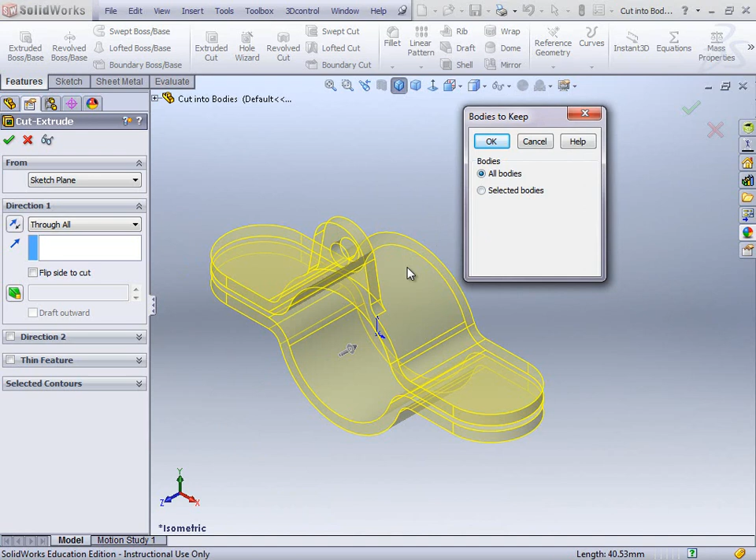We cut through all, and click OK. You see we get this prompt because we're now actually splitting this into two separate bodies. It's asking which bodies do you want to keep - all the bodies or just a selected body, so you can keep half or all of it. We're going to keep all the bodies, so click OK, and now we've got our two separate bodies, cut extrude 1 and cut extrude 2.

Okay, so once we've got those two, what we can actually do is go up here to the solid bodies folder and right click on that, we can insert into new part. So we can select that body and actually create a new part with it.

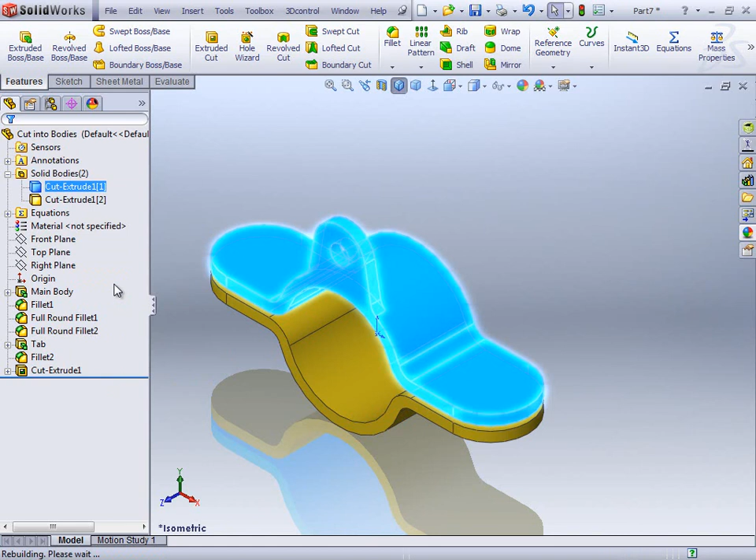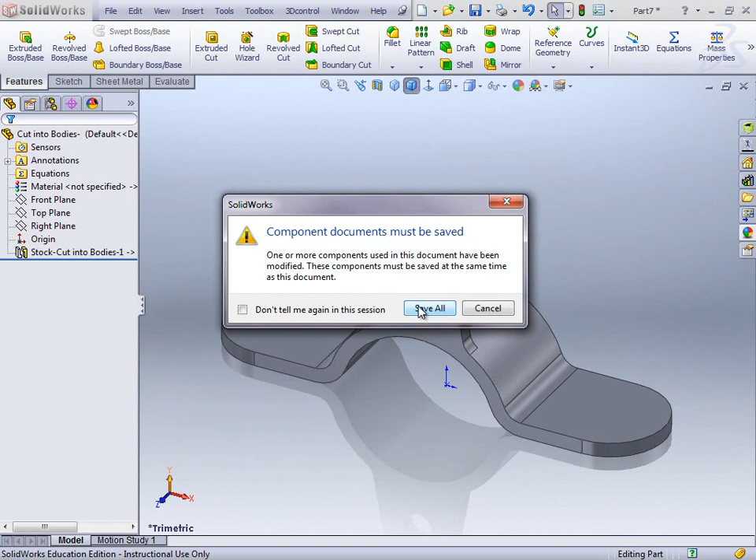So I'll just save it onto the desktop, onto a better spot. I'll call this one clamp top. So clamp top, and save that one. Save our documents there. So it's asking me to save everything once I've done that.

So if I go back to the cut into bodies part again, and right click on the second cut extrude, we can do the same again. Insert into new part. There comes a new part, and we call this one clamp bottom, and save it on the desktop as well.

So we've got two parts. Once we've got those two parts, you can see we've got a clamp top, clamp bottom, and we've still got our cut into bodies.

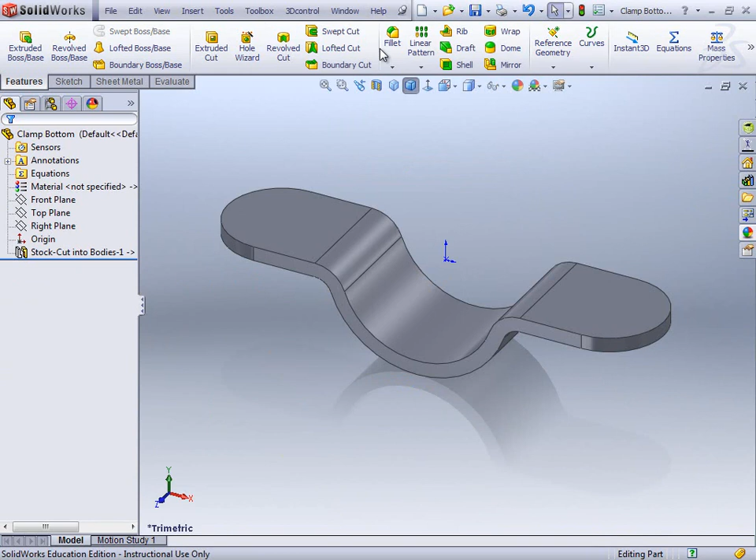Okay, so once we've got that, we can create a new assembly. Make new assembly from that part. Click OK, and we'll start off with the clamp bottom.

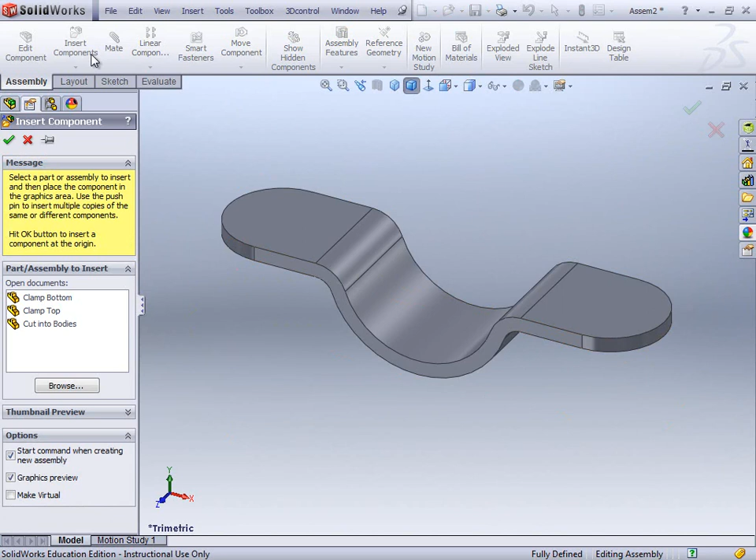And if I just do a little graphics preview on that, I click on the little green check mark, it'll throw it into the center point, and when I insert my component again and do the clamp top, if I select the little green check mark again, it'll throw it, and both of them are fixed in that location. You see, because they're related, so both of them are fixed there, so that's happy days. We've got our little assembly created.

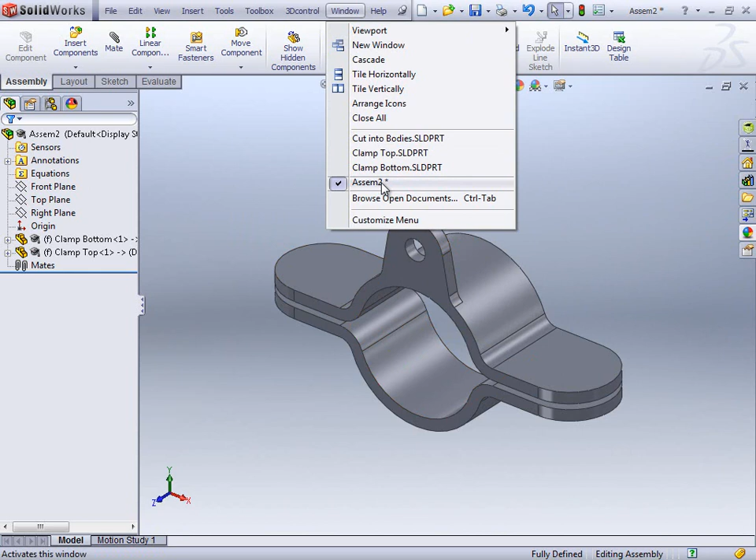Now if we go back to the source part, so we've now got an assembly, and I'd probably name that before I go out of it, so just save that again on the desktop. I'll call that one clamp assembly and save it.

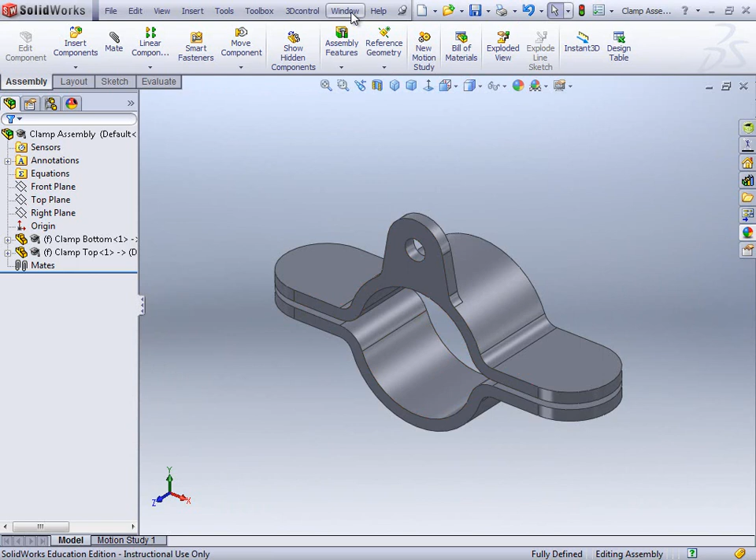I want to show you what else you can do. So once we've got the original, you need to keep this original source part. Okay, so if we go to this one, what we can actually do is select the sketch on the bottom of that, go normal to...

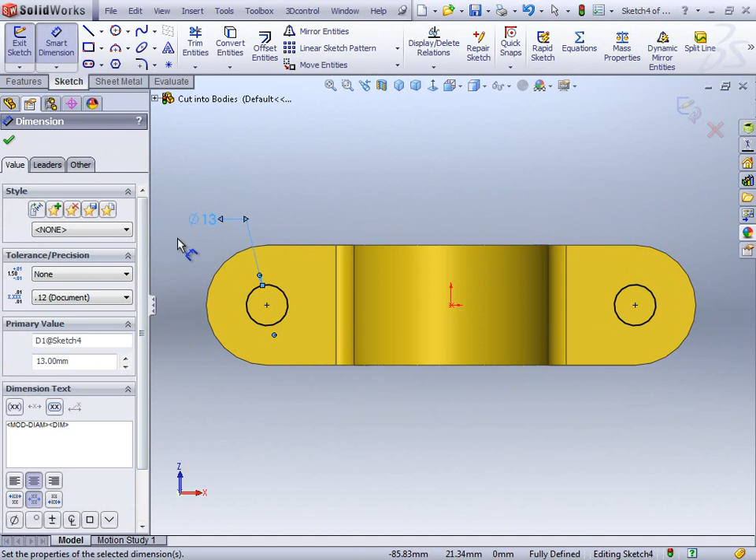And if I do a little circle on that, so if I make those two equal, and make them 13 mil diameter, and we do an exit sketch and extrude cut, through all.

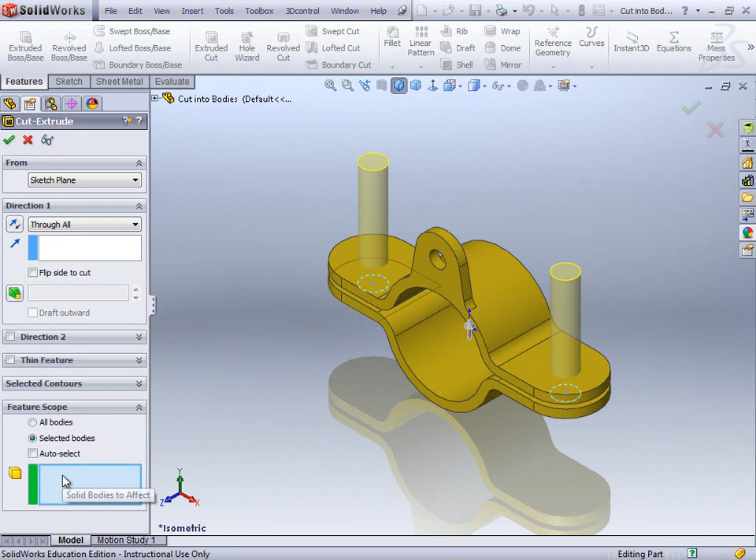So you can see it's going to go through all, but instead of going through both of them, let's say we just wanted to go through this one but through all of this one. So what you can do down here in the feature scope is uncheck auto select, which is going to select everything, and you can actually select the body - this is the part I just want it to go through, don't want it to go through everything. So click OK on that.

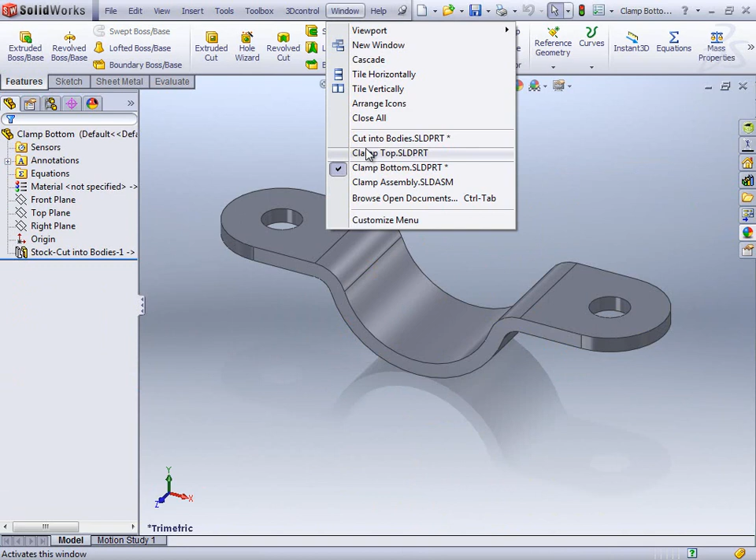And if I spin that around, you see we get our little hole, and it's just gone through that one solid body. Okay, so if I go across and look at my clamp bottom, you can see my clamp bottom has it, my clamp top hasn't updated - well, it's fine because there's nothing changed with that.

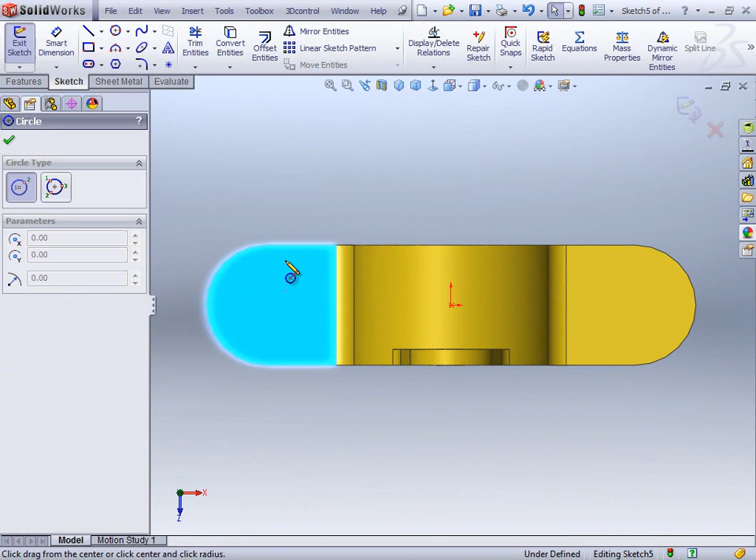So I'll go back to my cut bodies again, and if I select the top surface and do a little sketch on the top surface, and draw a circle in here, a couple of lines straight down.

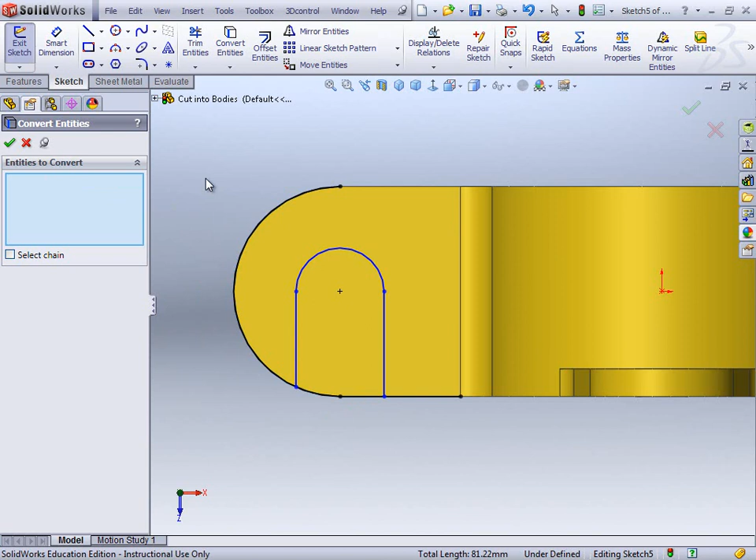And do a little trim on that, and then convert the entities of that edge, and then do a trim on that, and pop in a little dimension there.

We'll make this 7.5, slightly bigger, sort of a clearance hole if you like on that - 7.5, and click OK, and then we can mirror this, I suppose, to the far side.

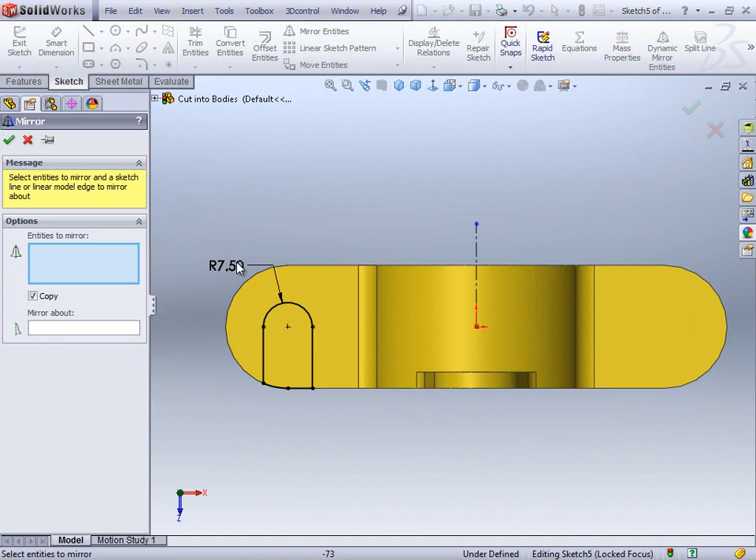Just draw the center line in there, and we mirror the entities to mirror those, mirror about that, and isometric. And we can do an extrude cut on this one again, through all.

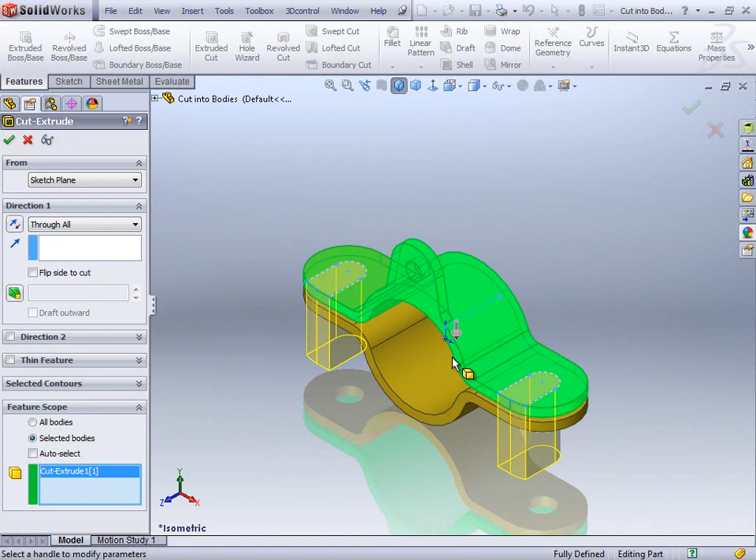And again, if we remove the auto select it wants to send it through everything, and we just say, well, we only wanted to go through this top bit. Click OK, and we get that nice little slot on the top.

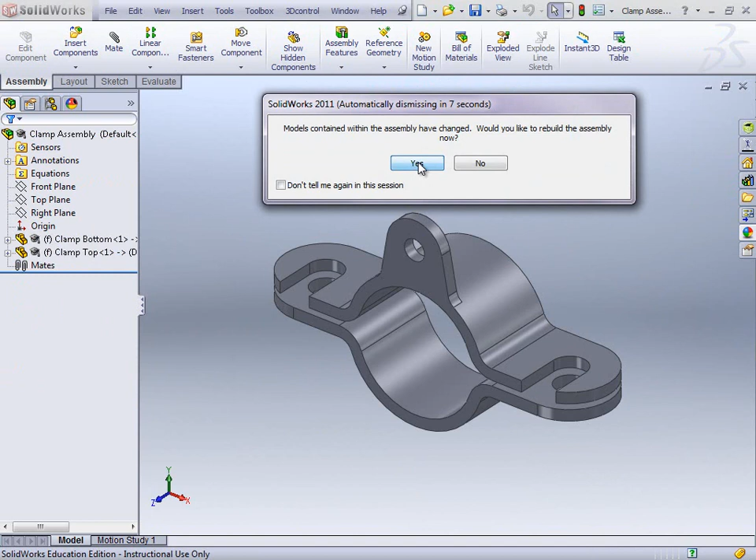I'll save that one, and then go to clamp top - you see my clamp top's updated, my clamp bottom's updated, and we go to our assembly then. So looking at the rebuild, yeah, rebuild, because we've made a few changes to it. And you can see that's my assembly with my little parts.

So a nice little feature, a handy little tool on that now for creating parts - one to think about and possibly use on occasion.